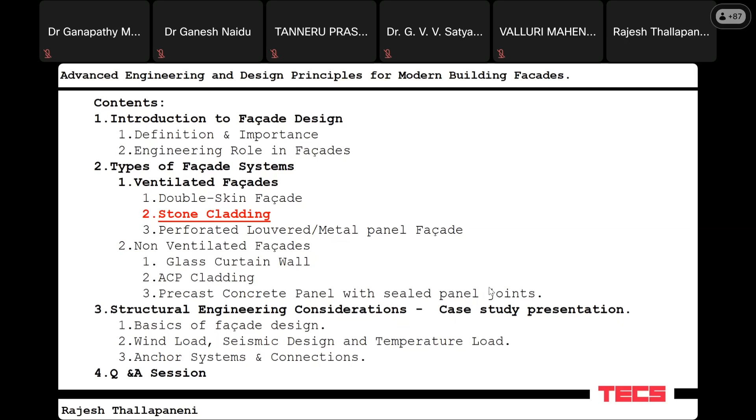So coming to our first topic of introduction to facade. Can somebody tell me what is a facade and why a facade is required for a building, and what is the significance of facade? Is it really required for a building to have a facade?

Yeah, can someone answer? What is a facade and where do we come across the requirements of facade in either theory or... yeah. Well, let's move forward.

So facade is nothing but a skin. As simple as we all wear a shirt to protect our skin or to protect our core body from a lot of external conditions, either it can be a summer season or cold season, to protect our body we wear certain types of clothes. So likewise, a building also needs certain protection, either against a harsh wind or extreme climates like cold winter where you have multiple seasons.

And also, as we dress up to look good to the people or to the society, the same way when you construct a building or a structure, we always anticipate that the building or the structure should look beautiful or iconic. So facade is the one which brings up that value to a building by showcasing the architecture.

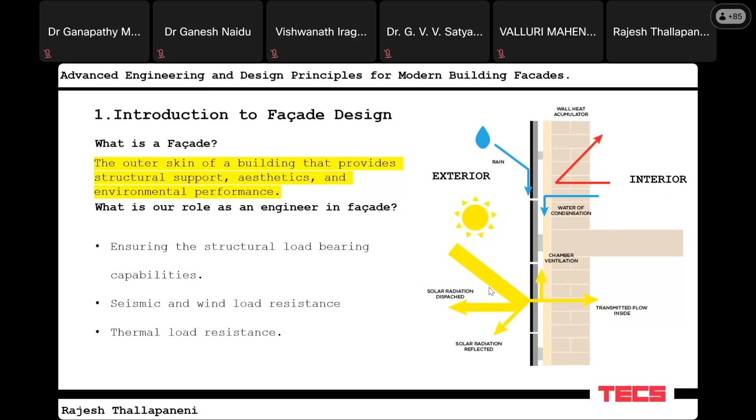So what a facade does, you can see on the screen where my cursor will be pointing. Just a second. So this is the interior side of the building, and this is the exterior side of the building, where you will see different situations the building is prone to, like direct sunlight, or an attack of UV radiation, or an attack of cold weather. So from these cold weathers, the building is protected.

So how the building is protected is, as I mentioned in the previous slide, the ventilated facade. There will be a gap between, say, assuming that this is either a stone or a precast panel, or it can be anything, even a glass. The glass will be installed at a certain distance from your building outer periphery. So this gap is what you see on the screen, usually maintained at maybe 10 centimeters to 20 centimeters.

What it creates is a low pressure between your building and the facade panel provided. So you see there are certain gaps over here where you would see some drain points for the air inside a building. These are very minute gaps of 5 to 6 millimeters, which will be maintained across the building between multiple panels. So when the air comes up, generally the wind travels at a speed of 150 to 160 kilometers per hour. This is the usual wind speed that we design a normal building or structure for.

So when the wind comes at that extreme speed, what this facade does is it controls the wind and it allows a limited wind to travel inside this cavity or this gap, as we call it. Since the force of the wind is arrested or eliminated in such a way that only a minimum amount of air pressure or air is allowed to go inside the facade, it creates a low pressure. So there will be a pressure difference.

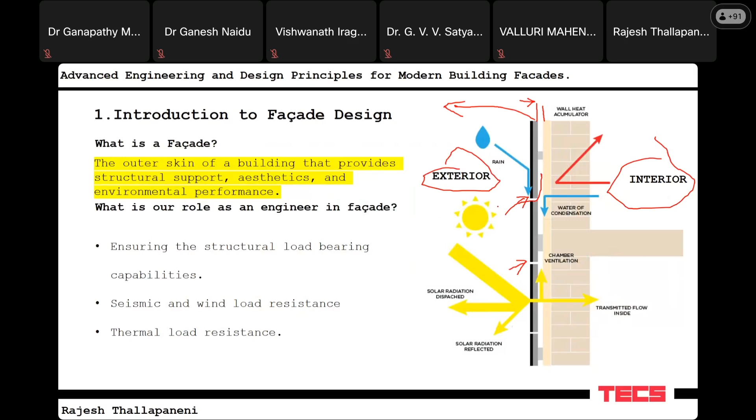So this is also a topic we will be discussing. As you all know, every material has its own thermal coefficient values. When it is exposed to sun or some heat, it has its own expansion and contraction properties. Concrete behaves in a different way, and steel is much more prone to heat, so its expansion is much more compared to other materials. So how do we deal with this, and how do we incorporate all these into your building? This is what we are going to discuss in the further slides.

Coming to the ventilated facade, here is a quick glance. There are three different types of facades, such as the double skin facade. It depends on the requirement: if you say it's a green building, there are certain levels or stages of proving the green building requirement, and through that these facades are selected. The more energy efficient a building you want, the better the facade you need to select.

On the screen, you see a person standing inside the building, and the blue lines I'm highlighting here are the glasses. Mostly the double skin facade comes from glazing or glass. There are different types, toughened glass and laminated glass. The principle is the same: there is an air gap or air cavity created with two glasses.

When the heat or the wind comes, the impact is resisted by the outermost glass, which is exposed to the environment. And there will be a low pressure created by allowing some vacuum or suction inside these two panels, which ensures that heat is not going to transmit from one material to the other, since there is an air gap or air void.

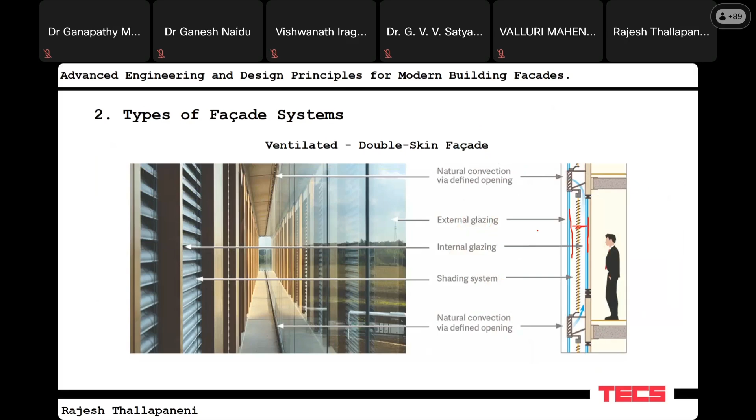So this is the whole concept that is followed in different types of facades. So this is the other one which we are going to be more focused on and which we will be discussing further with a case study.

So stone cladding. Two of the greatest examples I can give: if you see our recent parliament, which is built in Delhi, India, the new parliament is completely done with a stone from Rajasthan. So this is a live example, which I'm also a part of, certain part of the work, not the site execution, but the design phase.

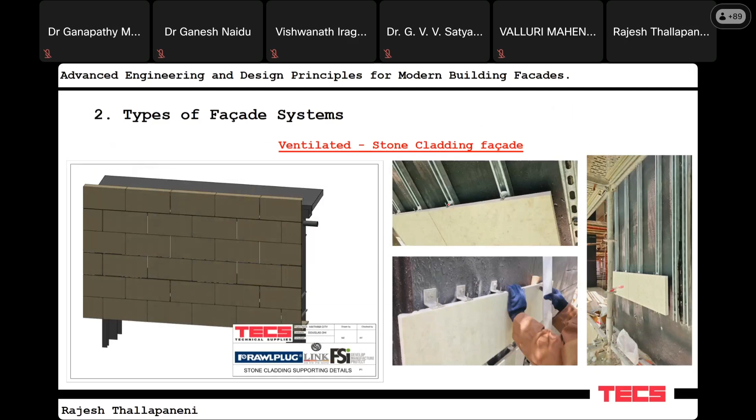And another project you might have all heard of, there is a diamond seller in Gujarat. So he also made an iconic building, which is a millions of dollars project. It was also done with one of the sandstones from Rajasthan. So these are the two iconic projects where you see a lot of modern facade coming up. If you get a chance to visit anytime, those are some of the best examples for facades in recent days in India. You can experience it live.

And coming to the third one, perforated louvered facade or a metal panel facade. So these are some of the examples from the country where I'm living, where you will have an aluminum sheet, which is resistant against corrosion, or a stainless steel sheet, which will be fabricated or molded into a certain shape required by the architecture or the building requirements, and which will be installed against the structure. So these are the different types of ventilated facade that are followed, but there will be different names in different industries and standards. Coming to the summary, these are the different facades followed across the globe.

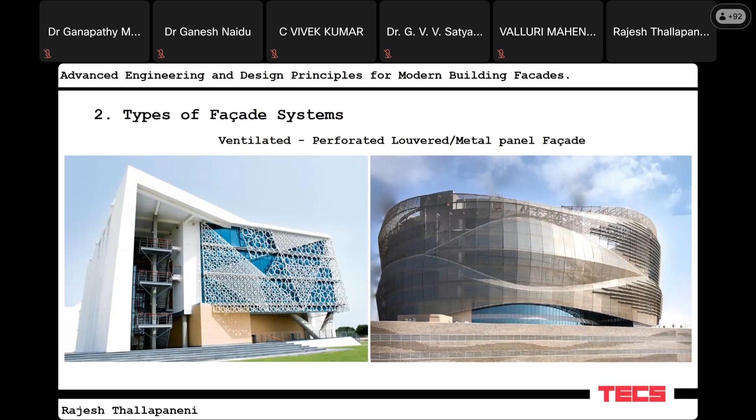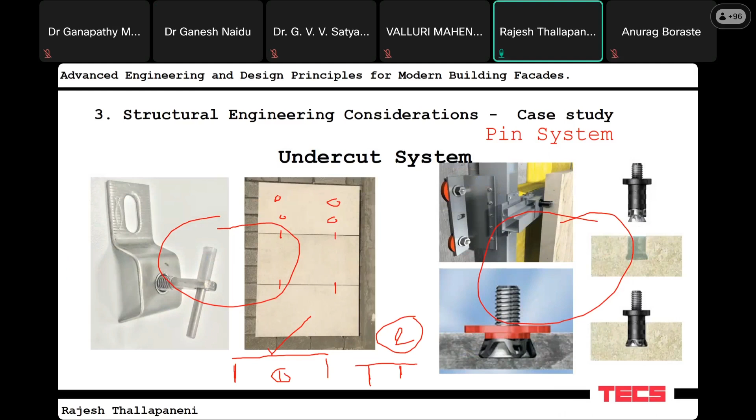Sir, I consider it as overhanging. Yeah, good. I couldn't see you since I'm presenting, but yes, that's the right answer. It's simple: the unsupported length. If you consider the length between the two supports as L, here it is going to be L, whereas there it will be like 1/3 of L. We are dividing it and making it a cantilever on either side, which is obviously safer in terms of deflection or bending stress, or flexural strength of that particular piece.

So in simple terms, you can take a paper. If you can see me on screen, I don't know whether it is clear or not. Holding a piece of stone like this, or holding a piece of stone with two hands somewhere in the middle. What is going to be stronger is your propped cantilever or overhang option, right?

So again, coming to the system, the pin system is quite old and traditional. It is in practice, it's not bad. It's a quite good system, but it has its own limitations, as every material or every system has its own limitations. The undercut system is an advanced, new system, which is much safer and which gives a sort of peace of mind.

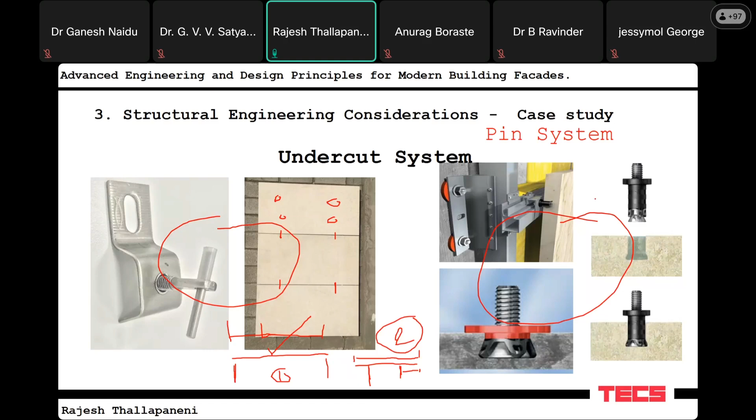Yeah. So out of that only these advancements have come up, the trends have changed, and different systems have come into the market. So coming to our case study, you can see on the screen one of the projects handled by our company and our team, and I'm a part of it. This is a commercial and residential building based in Oman. Why I presented this particular project is that in this project you can see almost all the ventilated facades we discussed.

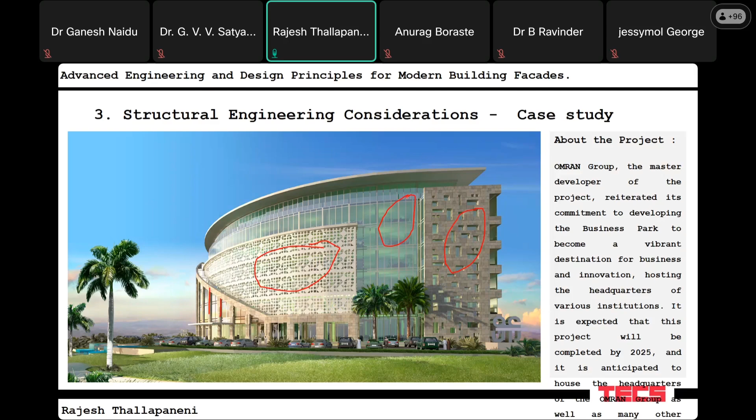So if you see on the screen, these particular parts are with stone, where you see these strips, and there is a perforated metal facade, and there is glass, I mean the ventilated glass or the double glazing which I mentioned. So the idea of presenting this is that there could be multiple systems adopted in a project, or it can be one system, or a combination of different technologies. It's not rare that we see multiple systems. It's very obvious that any building you choose, there will be glass, at least a window or a door, or there will be a mashrabiya or something which should look beautiful.

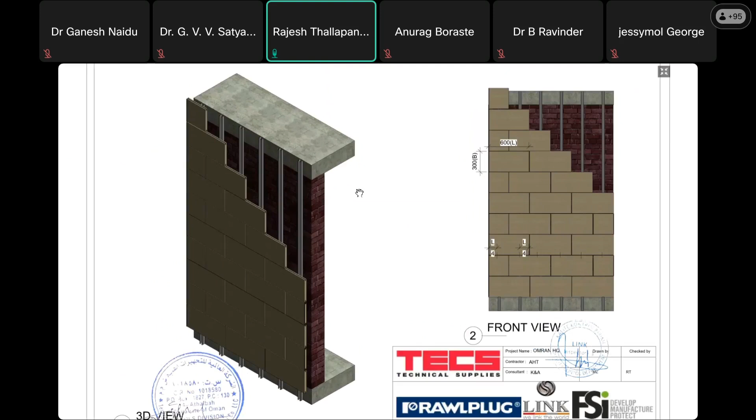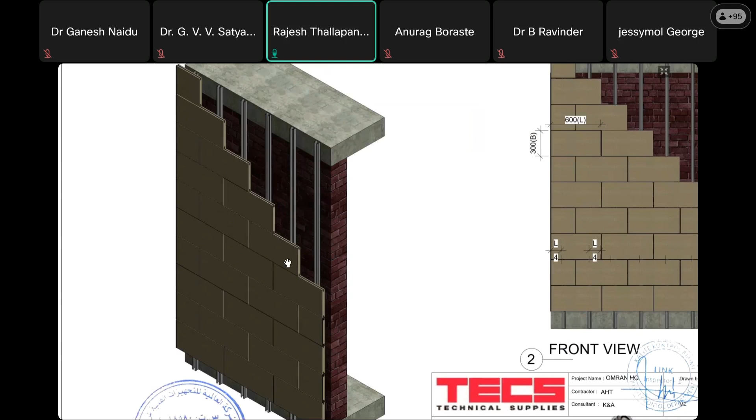Yeah. So just before going to this, what I would like to explain is this is the typical proposal or drawings which we generally make to present to the consultants, or sometimes we also present to the municipalities to take approvals if the project or the client specification requires it. So this is a building where you can see the floor to floor, and there is block work. There is a 3D visualization. There are certain metal profiles installed along the building height, and the gray panels you see are natural marble, Omani marble, or generally we see granite, which is also quite famous from the Indian market.

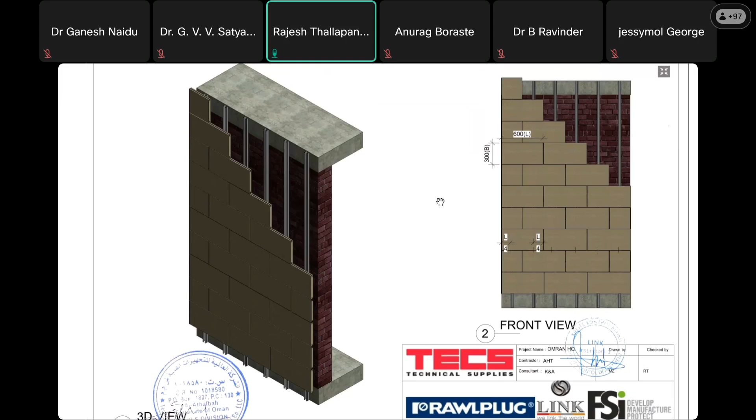So these panels need to be installed on a building which is 40 meters in height from ground level, and which is close to the sea, around 15 to 20 meters away. Why I mention these points: when you have a building located on the beach side, you get abnormal wind pressures or abnormal wind impact on the building, which is directly exposed when there are no tall buildings, heavy structures or mountains that reduce the impact of wind. So that's the reason for this choice.

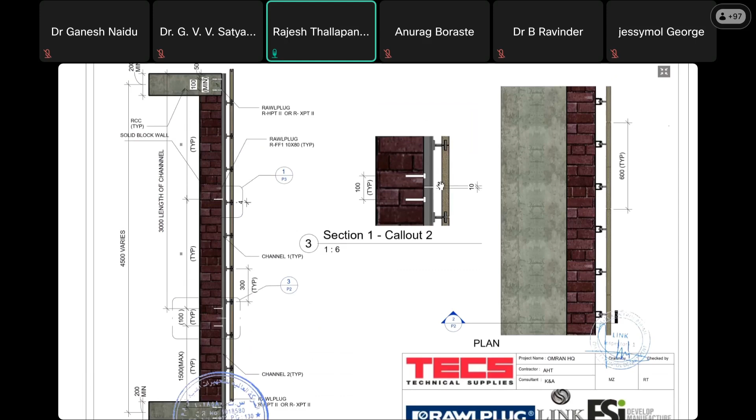For example, if you bought a TV and you want to fix it to a wall, you will use some screws and plugs, right? Since it's a TV, a weight of maybe 100 or 150 kg, you're using a small screw. But just imagine you want to clad the whole building with stone, tons and tons of weight. So you need something strong and rigid enough to withstand the loads, maybe, as I mentioned, 160, 170 kilometers per hour wind. It creates a lot of intensity on the building, the fixing and the panels you are selecting. Those details we will be discussing.

So coming to the first topic, what are the different loads that come up in a building when you design it, or when you think of a building as an engineer, what are the different types of loads you come across? Can somebody comment on the different types of loads you usually consider when dealing with these aspects? It can be anything. You can put it in the comment box also. On the other side, I'm reviewing the comments.

Yeah, earthquake load. Yeah, Mr. Anup said. Yeah, Miss Hima, yes, dead load and wind load. Yes, obviously. In the presentation, we discussed one more load. Yeah, dead load, live load, wind load, earthquake load. Yes. There is one thing which we are missing, as I mentioned.

This is a facade which is exposed to the environment. So each material has its own thermal coefficients, so expansion and contraction happens on its own behavior. Yes, weather conditions, which is nothing but temperature loads. So the facade makes a major difference in temperature loads.

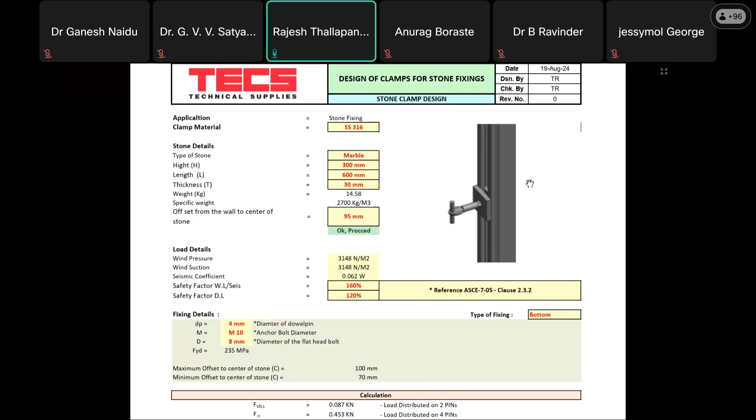So yes, when we choose facades, as you could see on the previous proposal which I mentioned, there are three different elements involved. There is the concrete, which you see in the red color, then you got some profile, which is made of steel, and then there is a panel, which is naturally available stone. So each one has its own thermal coefficients. The behavior of the material, the expansion and contraction, is completely independent.

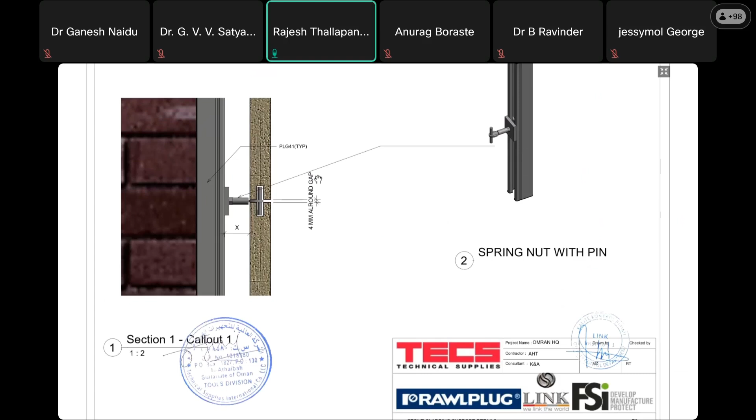So steel expands in a different way. Maybe it expands more, the stone expands less, and the concrete expands in a different parameter at the same temperature. So how do we accommodate this? So this is what we are going to discuss.

So when we are going for the design of any structure, or it doesn't need to be a structure, it can be a panel, or any building element, the first and foremost important thing is that we need to identify where it is located. So there will be impact based on your building location. Just a quick example: there are a lot of parameters, but to summarize, terrain category is one. So what is the surroundings of your building?

So assume you have a building of 10-meter height, and your building is completely surrounded by tall structures which are like 30 or 40 meters. Generally these buildings are designed for 80 to 100 years of life. There are certain codes, whether it is a temporary building, storage facilities, hospitals, or commercial and residential buildings. Based on that, your building life is designed. So when we choose such buildings, we need to take care of your topography, what different situations are across.

So we have codes which define what kind of load we need to take and what kind of parameters we need to consider. A quick example, if I refer to Indian codes, IS 875 defines the impact of wind, how it has to be considered, and IS 1893, if I'm not wrong, defines how the seismic impact needs to be considered.

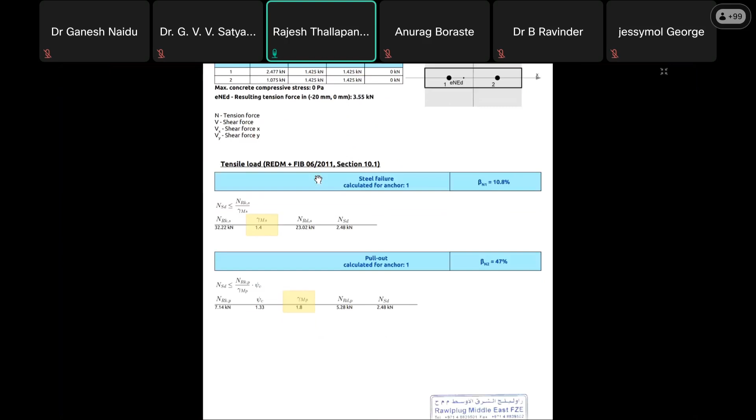So coming to the wind design, there are a lot of pages of reporting, but we'll quickly go to the wind analysis. So this particular piece, the building height is 40 meters. Any building above 18 meters is considered a high rise, and below 18 meters it is considered a low rise building.

So how does this high rise and low rise effect come into the picture? Whenever you consider the height, what happens to the wind and to your seismic? The more the height you go, the higher the impact of wind. If you see the pressure diagram of a tall building, there will be a minimum wind pressure at the zeroth level, and as the levels keep increasing, the wind impact will be higher. So it's a freestanding cantilever in simple terms. This is what considering a building as low rise or high rise predominantly affects.

And as I explained, there are certain parameters we need to consider, such as the exposure category. There will be categories A, B, C, D, which are defined based on what surrounds your building, whether it is open terrain, closed terrain, or there are mountains around the building.

So there are different parameters, including the directionality factor. These are all data available in the codes. The idea is that they gather data from the last 100-200 years, and out of those significant effects, certain cyclones are also considered as parameters when they define the codes and standards.

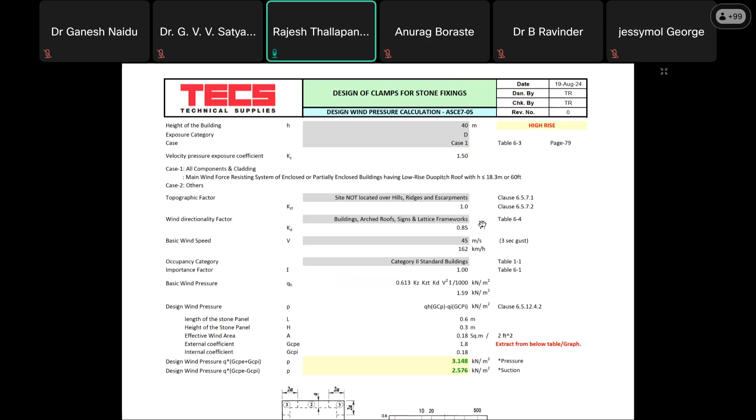So these are all incorporated, and some basic input data needs to be considered from the code, like how we calculate the unsupported lengths or the deflection limits for simply supported, cantilever, or fixed beams, which were defined in the codes. Similarly, there are certain parameters defined in the code for calculating the effect of wind, seismic, thermal, dead load, or live load.

These are also the graphical representations or pictures. Based on the building type and geometry, whether it's a circular or rectangular building, the shape of the building also makes a predominant effect on the impact of wind pressure on the building.

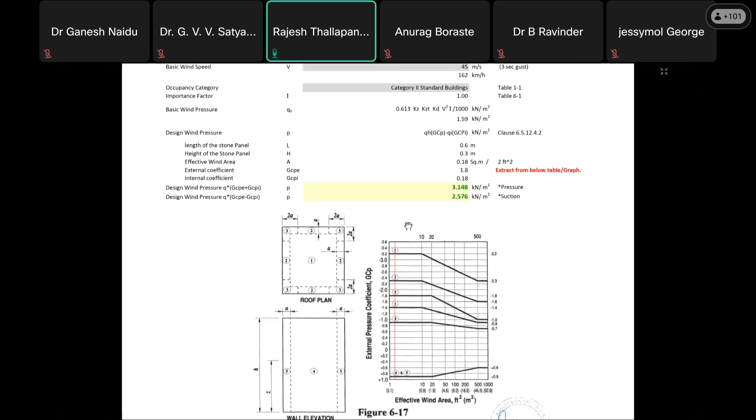Considering all this, we arrive at a wind pressure calculation, where we generally hear about wind speed as 45 meters per second or 160 kilometers per hour. However, when it comes to designing any element of a structure, it will always be converted into pressure. There are certain formulas and coefficients to consider, which I will not go into detail, just a quick overview.

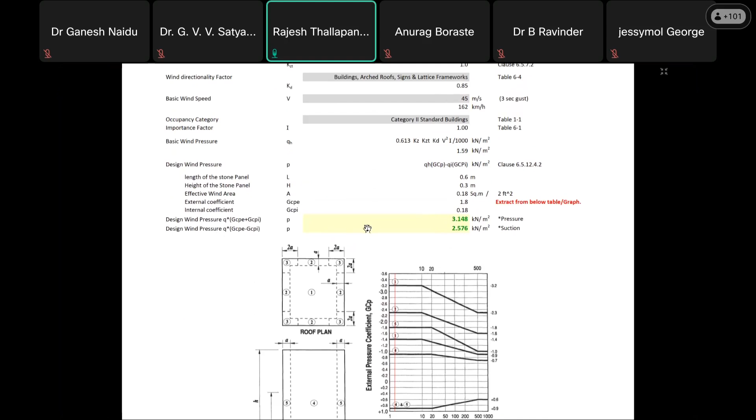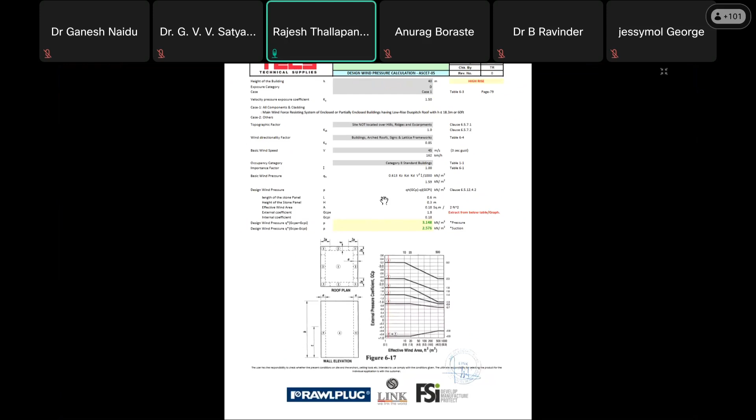So once the building design has to be initiated, you should be clear about the parameters, and you arrive at your wind speed. Once your requirements are clear, you consider the impact of wind and the impact of seismic activity. It's nothing but the base shear value that needs to be calculated, which we will see in the next slide.

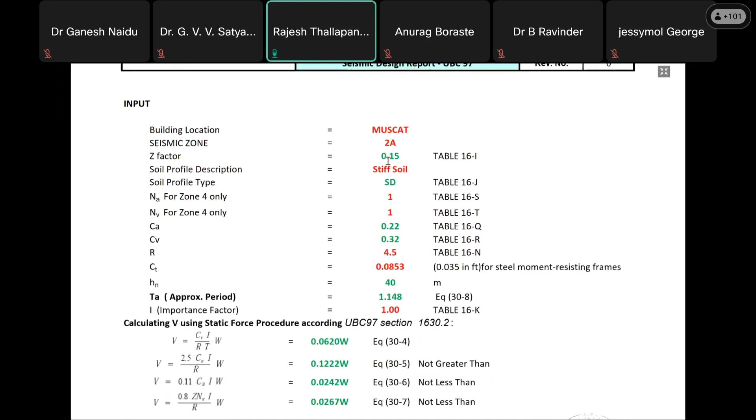So these are the tools which we developed, which will not go into much detail, but you will have proper code references, and know from which table or clause these formulas are considered.

For seismic design, generally we follow Uniform Building Code 1997, which defines your seismic zone. Here we have two zones, 2A and 2B. I think in India we have 3 or 4 zones, sorry, I don't remember exactly.

There will be soil conditions, whether it's stiff soil, loose soil, dense, or rocky soil. Based on that, you derive your soil coefficients or calculate the soil bearing capacity, and arrive at certain figures from the code book. These will be your response reduction factor, coefficient of soil, importance factor, and time period. These are all calculated based on basic formulas available in the code with respect to building height and soil condition.

So you arrive at a base shear value, where this is my coefficient for the base shear value of a particular project. I will multiply this with my unit weight, W, which you multiply with, as I mentioned, for example if you're installing a TV in your home on the 50th floor of the building.

The weight of the TV is, say, 100 kg, but the impact it creates is lesser if the same TV is on the ground floor, because from the point of seismic activity, it's at a 3 or 4 meter height, typical of a floor height. But when it's on the 50th floor, the impact is going to be much heavier. So the more the height, the more the impact.

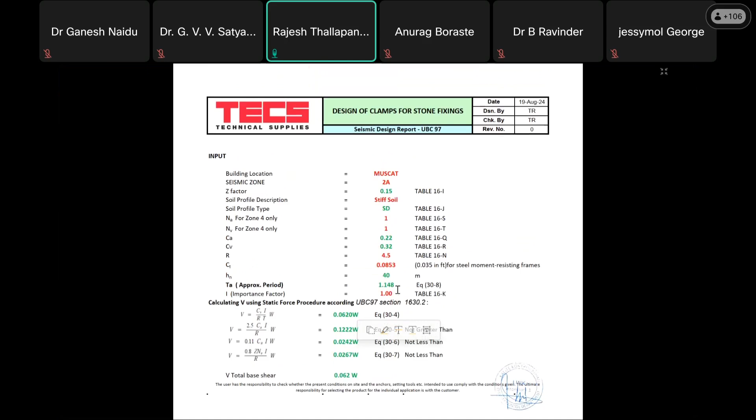So these are the parameters that need to be considered. As we discussed, wind is one variable parameter which we need to pre-calculate, and seismic is also a variable one which we need to pre-calculate. So these are the two, and coming to temperature, which is the third one.

So as mentioned, we are using multiple materials, and every material has its own temperature coefficients. The critical ones we always consider are natural stone or metal, which are the predominant elements we use. Those should accommodate the thermal or temperature variation which comes up.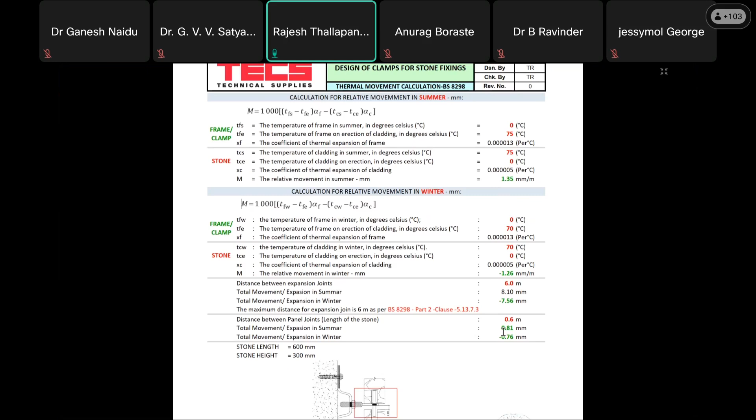So then you arrive at an expansion and contraction of these materials. Like I mentioned, the stone may expand say 1 millimeter, but the metal may expand 2 millimeters. So we have to consider the worst scenario because that's what creates an additional stress.

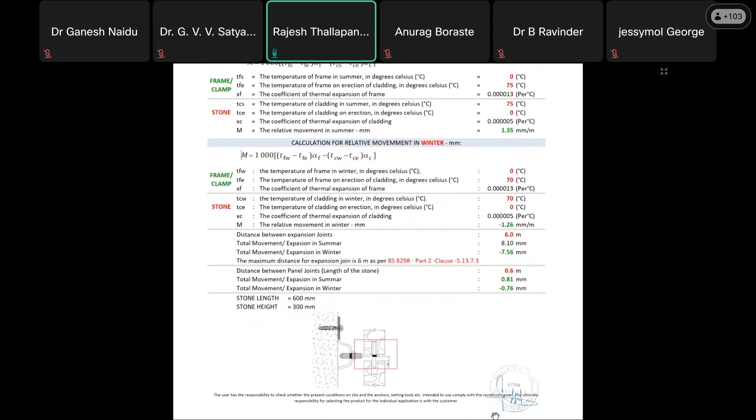So we provide an expansion joint, where you could see a typical sketch or drawing, between the panels. If you consider top and bottom, highlighted in the red box you can see on my cursor, there will be a minimum gap that is maintained. For this particular project, the expansion happens to a maximum of 0.8 millimeter and a contraction of 0.76 millimeter.

So we decided to provide a 2 millimeter gap, keeping a lot of considerations in mind, including workmanship installation, since there are certain chances mistakes may happen because you will not always get skilled labor on the site. Keeping all these parameters, we decide the expansion joint. So whatever the climatic situations or stress variations happen in the structure, these expansion joints will take care of the facade or building by not implicating any additional stresses on the particular segments, which will be free to expand and free to contract.

A live example on a large scale I can give you: consider you are moving on a bridge. At every 3 or 4 meters, you will hear a tap sound when you are going on a car. These are nothing but expansion joints which are allowed on the structures, where these expansions and contractions are taken care of. So either it's a bridge, a building, a facade, or even a small drywall partition or blockwork in a home.

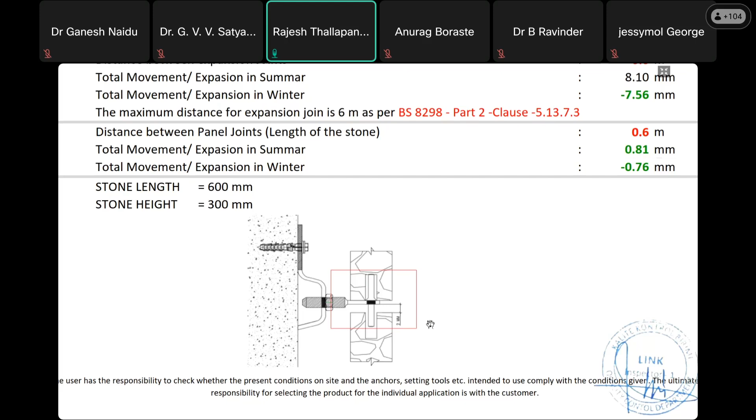So these are the 3 different loads. The other 2 loads left over are the dead weight and the live load. Live loads are not a predominant aspect in the facade - it will only be a chance of cleaning load, but people are not going to stand on it because the facade is vertically flatted on the building, so it's not a significant parameter to be considered.

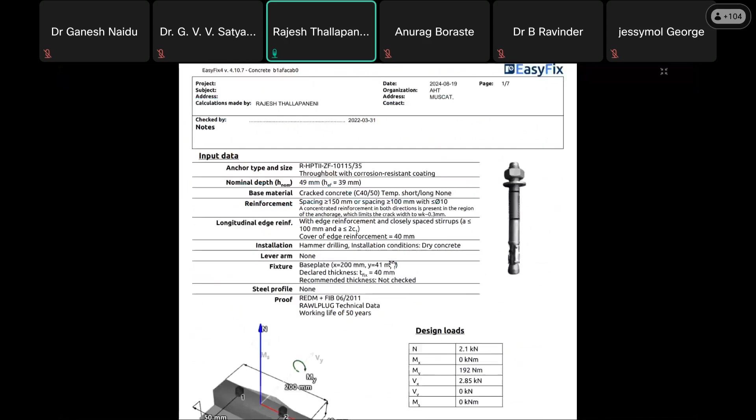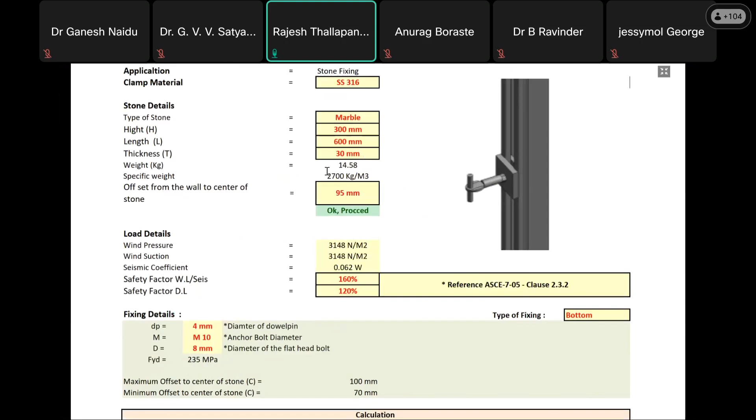However, the dead load is predefined because it includes the panel's own weight, which is precisely chosen. The dead weight is always a constant weight, so it will be taken care of. As you see on screen, the dead weight, or density, significantly derives the weight of each panel. 2,700 kg per cubic meter is the dead weight or density of a 1 cubic meter panel that was considered for this particular case being presented here.

So this is how it goes. And coming to the last point of fixing of all these things.

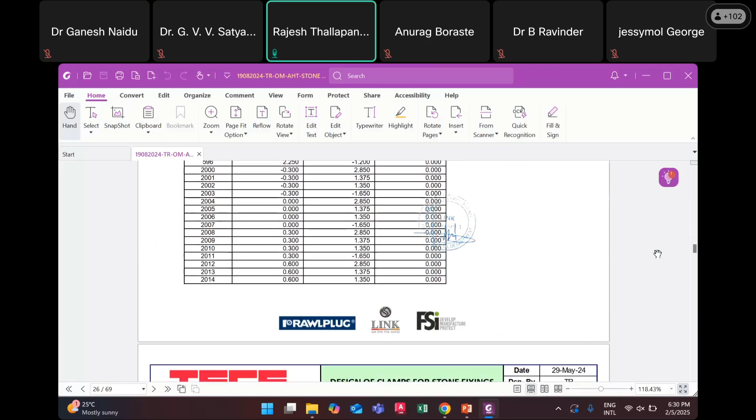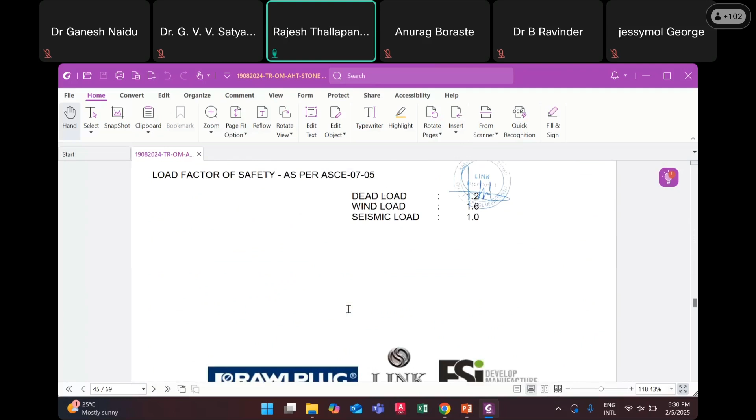There are a lot of options available in the market, but as I mentioned, as we are ensuring safety and standards, there are certain parameters that need to be considered or approvals that we need to retain when choosing a product. These are the tools which we develop for our customized design checks and design submissions, which are not openly available in the market. But on certain notes, yes, it can be.

So... sorry, somebody have a question?

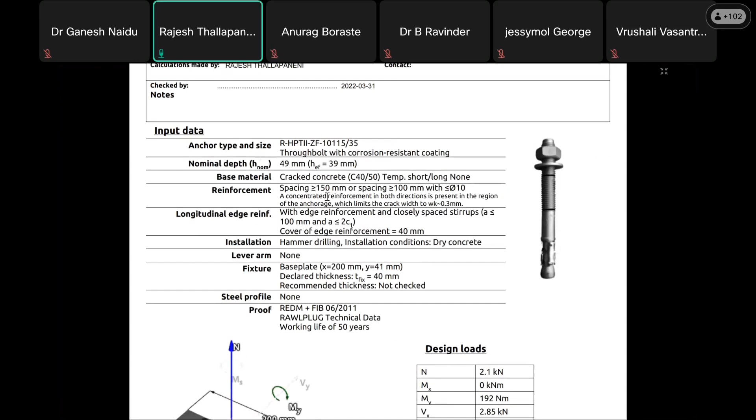Yeah, thank you. So you could see that this particular segment what we have designed. We are going to attach this using multiple anchors, where you could see the tension loads, the representations, and the table values here.

N is nothing but the tension load or the pull. You are trying to pull the panel away from the building, and you test it, which is either axial tension or a pure tension load. As I mentioned, the panel is going to be a little away from the building, because it should be a ventilated facade.

You are installing a panel at a certain distance, which is again the concept of cantilever effect. So your load is acting at a distance of X or P, whatever, which creates an additional moment. So you could see the moment values and shear values, obviously.

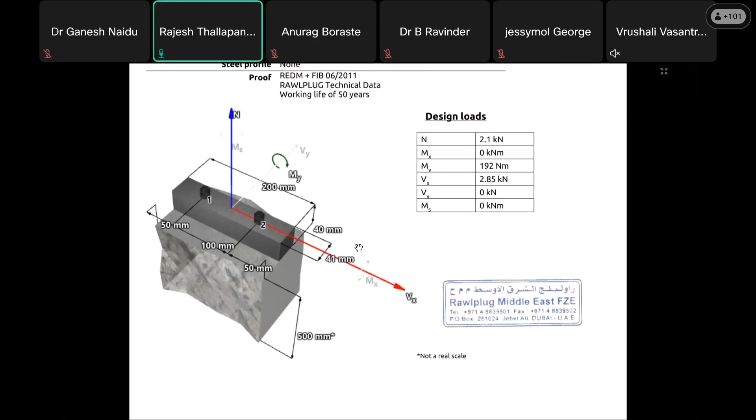The overall idea of this is that, end of the day, whatever the design or concept, whether it's a big building or a small panel, the whole science lies in your shear force bending moment diagrams. That's it. Okay, so yeah, there's a difference.

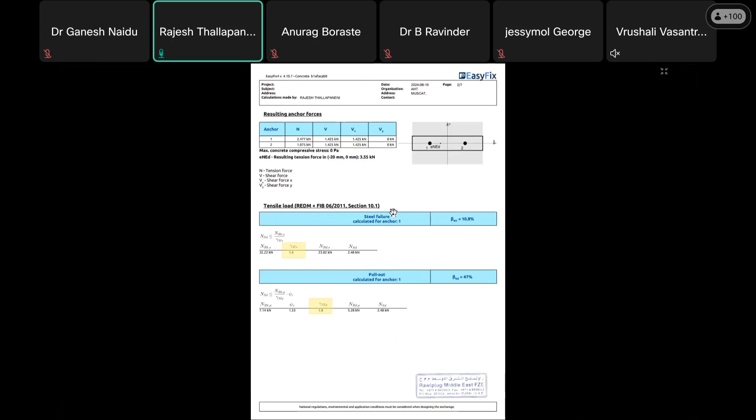Also, when you're fixing certain items, you could see a piece of metal over here, which we call a post-installed anchor bolt or a through bolt. There are so many options for it. The idea is that generally anchors need to be kept before we put the wet concrete, but a lot of technologies and things have come up since.

To give a simple example, say you want to fix a ceiling fan in your home, and the home is 5 or 6 years old. How do you do it? You drill, and the mason comes and puts some anchor and then tightens it. The one which I showed is the same, but on a higher side, where you have 50 years of design life for this, and there are certain things which can give 100 years as well.

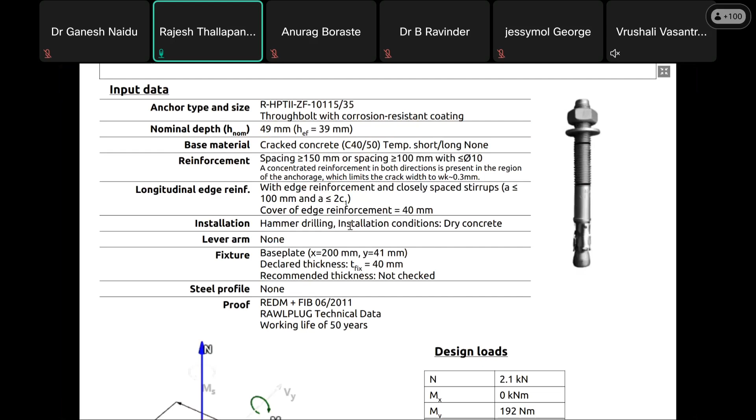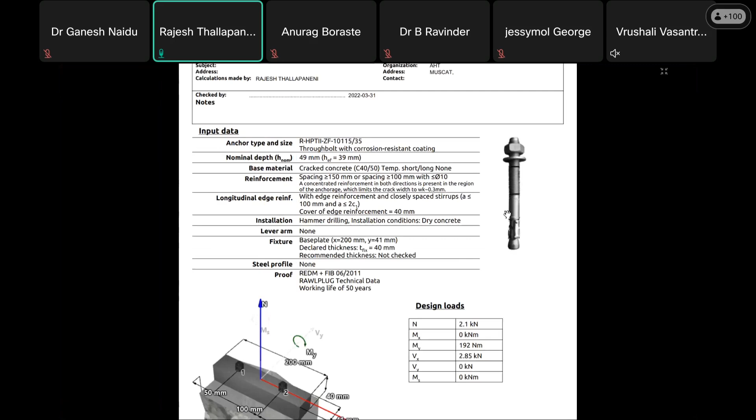These are mostly used in hard materials like concrete. This is the topic of building materials, which I will just touch on and not go too deep into. So you have materials like concrete, which is quite hard and can resist much load, and you have blockworks. You see a lot of innovations and research papers being done - fly ash bricks, hollow bricks, lightweight aerated concrete. So you name it, there are so many blocks.

So how do we deal with all these materials? If you see in certain malls and structures, the blocks are completely eliminated by putting a gypsum partition, where the inside is completely hollow. So how do we deal with such items and how do we fix it?

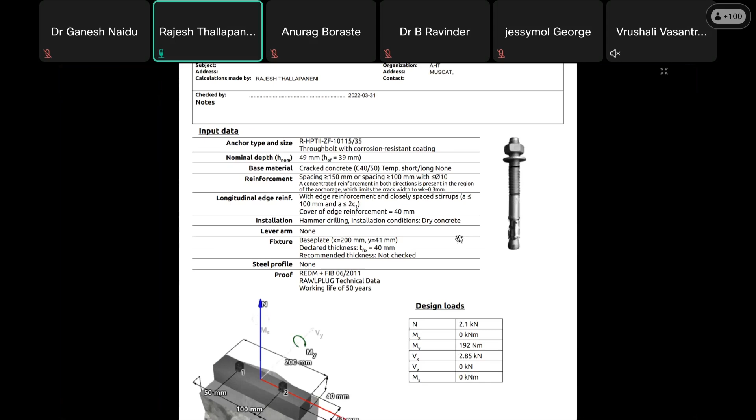We have a similar situation in this project. The one which I showed you previously is for concrete, and here we have a solid block which is very weak - something you just hold with two hands, lift above the head, and throw it, and it breaks into two pieces. It's that weak.

So how do we deal with such materials? Again, there is going to be a plug and screw type anchor, which you would also see in a lot of hardware shops, or as I mentioned, you get as a kit when you buy equipment like WCs, TV units, or cabinets. This is also on a higher note, made to withstand the life of the building.

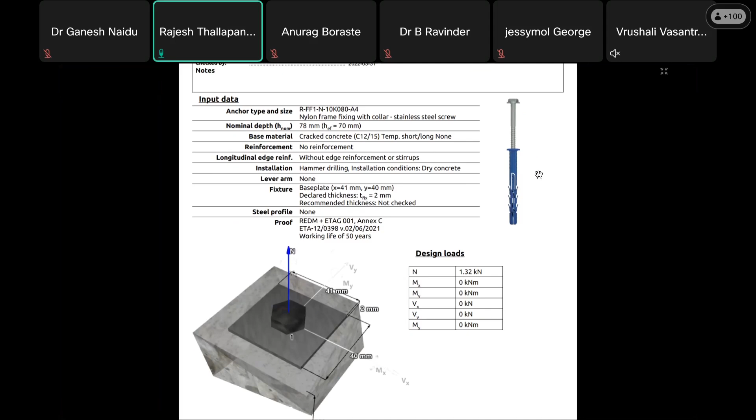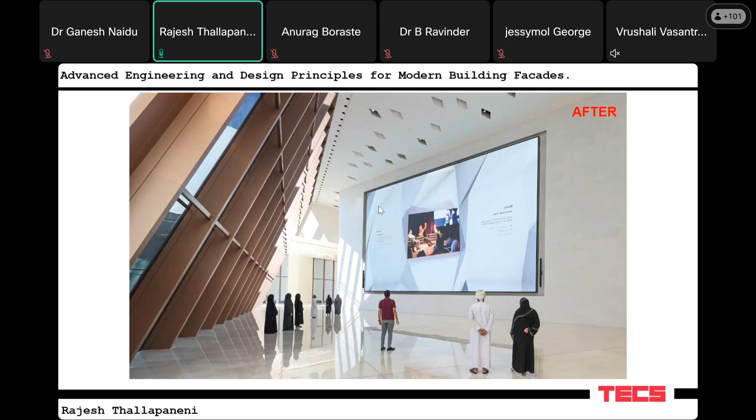So the whole system is not standing on very strong concrete or something. The whole system is standing on the metal profiles or the slotted channel profiles. So the idea is that these are all pre-engineered, so you don't need to have a lot of headache or a lot of things on site, and they can be reused. So tomorrow, if they want to dismantle it, it's just a matter of 2 or 3 days to dismantle everything and keep it back in the shop.

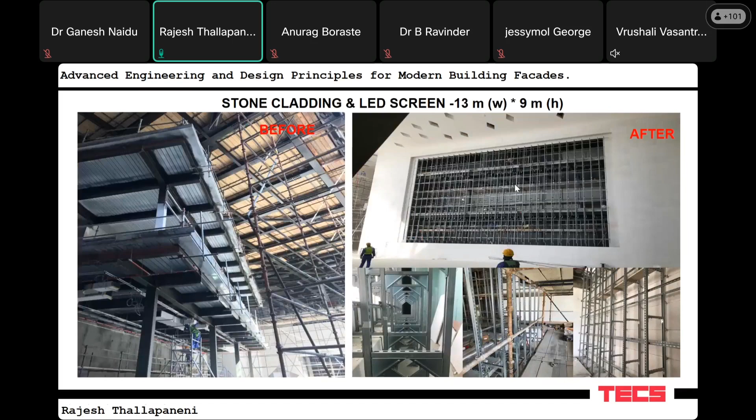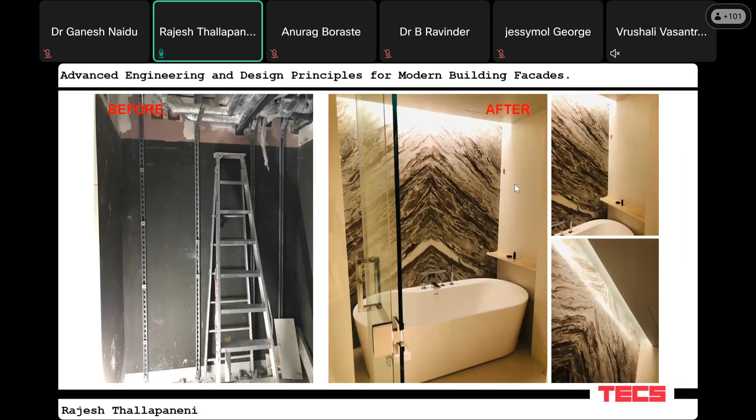So these are some more which look very minimal, but significant engineering is involved in them. So if you go to any hotel, you would see a lot of beautiful bathrooms. There is a lot of engineering behind it as well. So there is no limit for an engineer, whether it is a mega mall or a superstructure that needs to be constructed. The same shear force and bending moment are involved in every aspect of your daily life.

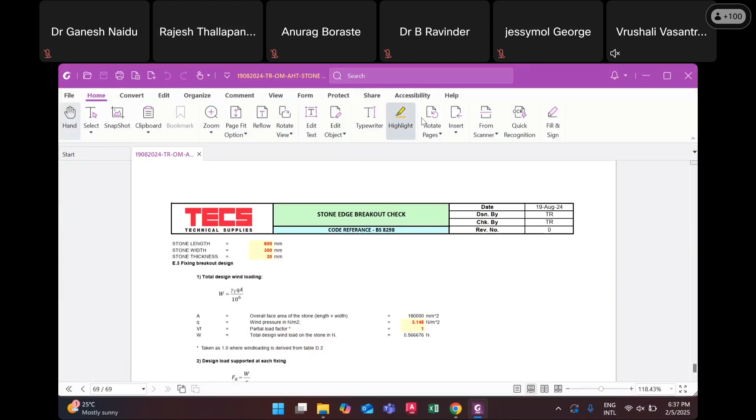Hello. Request all participants, please go through the Q&A session. If you have any question, yes, Mr. Rajesh, you have a question on the chat box. Can you please check it? Yeah. Yeah, Mr. Ganesh Naidu, thank you.

What considerations must be made when retrofitting an older building with a newer facade system to enhance performance while preserving historical elements? Yeah, coming to the old structures, that's really a nice question. Old structures are a little delicate. Before doing any rectification or modification, it is always very important to do non-destructive testing on the structure. There are a lot of methods available in the market or with industry. If the building is more than 100 years old, you have to check whether the strength of the existing concrete or block or whatever material they have used is in a safe situation to go for a modification.

If not, there are also certain things which can be used for retrofitting, where you can strengthen your structure by injecting some epoxies or by adding additional reinforcement without damaging or demolishing it. We regularly deal with such items, which we call rebar applications or retrofitting applications with epoxy. This is again a very big subject, so I would like to address this on a personal note, or if I get a privilege to provide another session on that, sure, I'll be happy to take it up.